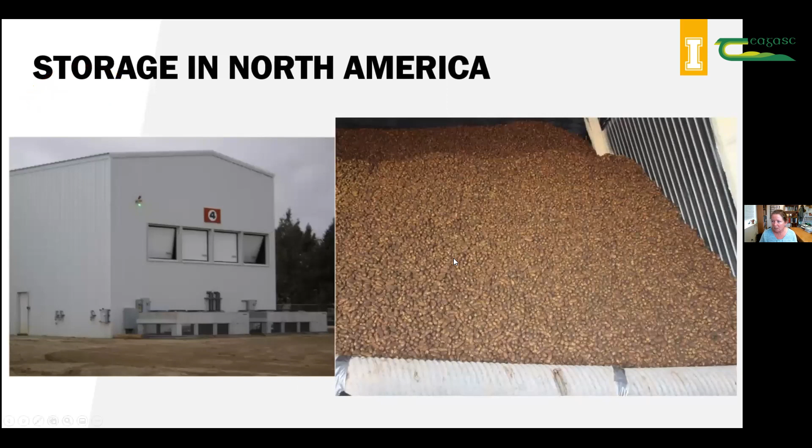The Pacific Northwest, which I have highlighted in yellow, produces about 50% of the total US acreage. And the reason this is important is how important climate is in terms of how we manage our storages. Our management has evolved because of our climate: in this northern tier we have warm days during the growing season, cool nights, and then cold winters and low humidity. This allows us to really modify what we need to do in storage.

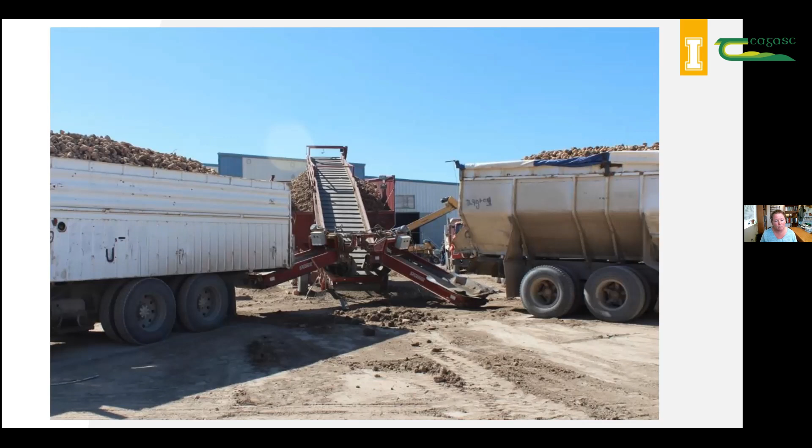And I realize that does not account for the maritime conditions, the higher humidity states. But I'm going to address more those areas where we have the opportunity to adjust that. We produce a lot of potatoes in a short amount of time, and that could be almost to our detriment. Potatoes go in very fast, in a lot of bulk, and that doesn't allow us to pivot or adjust very quickly, primarily because our harvest window can be very short.

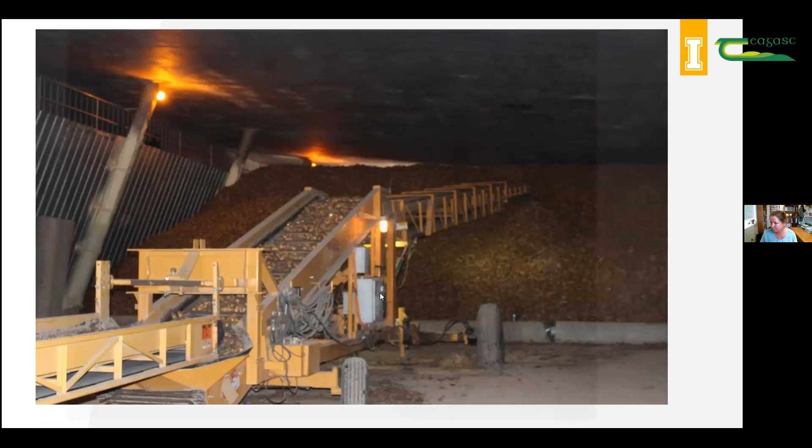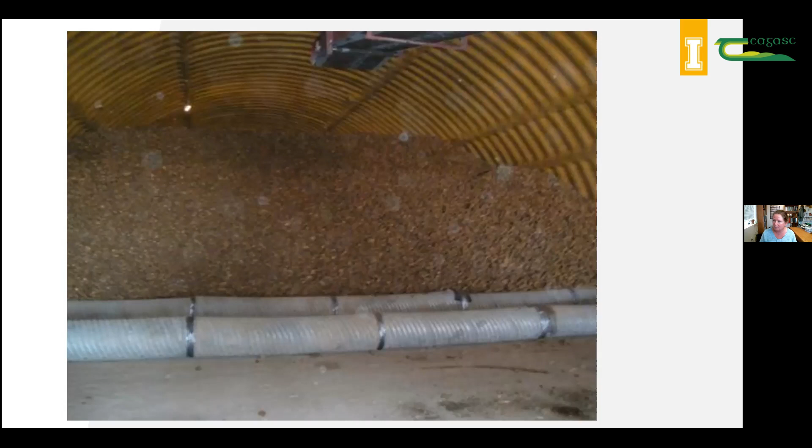Predominantly all the potatoes grown in this area are bulk piled. We either use above ground duct systems like you see here, which is very common in Idaho because we have dirt floors, or, more in the Columbia Basin of Washington and Oregon or other regions of the US, in-floor duct systems. So it can vary depending upon storage capacity, the ability to flume potatoes out, all those kinds of things. But in Idaho we are dominated by above floor plenums.

Here's an example of what our storages can look like. We fill them very tall with a lot of bulk potatoes, which does not give a lot of flexibility. One of the things we have been doing is building very large storages, and some have what we call a split bay storage with one ventilation system. So you may have 150 million pounds of potatoes on one side of the bay, and another bay has another.

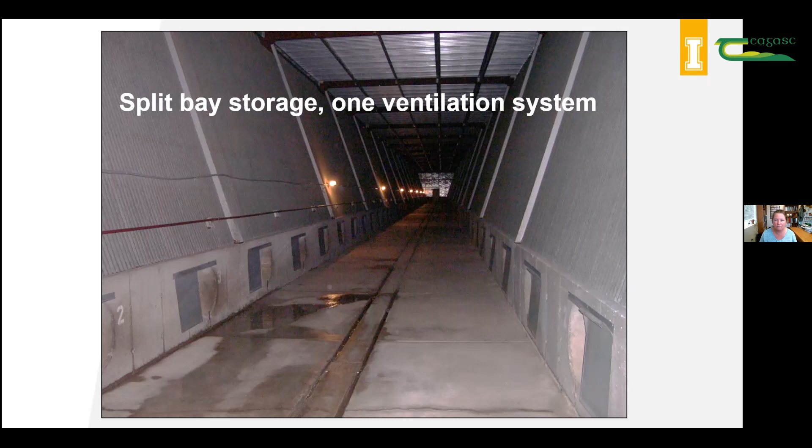And so the difficulty is that, yes, we can store a lot of potatoes under a common roof, but you're not able to manage small areas that then have problems. Or if you're harvesting under different weather conditions, it doesn't allow you to pivot very easily. So we're really trying to micromanage some of these areas within these storages, or make decisions that affect all the potatoes, and that can be very costly or very difficult sometimes.

Almost all storages, especially in the Northwest, again, not including the Maritimes and the far western areas, use evaporative cooling systems. This allows us to have humidity close to about 85%, give or take. So that's a nice background base of humidification to have. And then we're able to have a supplemental one. Here's an example of a centrifugal humidifier that gives us some supplemental humidification when we need it.

There's a couple reasons why the backbone of our storages relies upon evaporative cooling pads: not only does it give humidification, but it also allows us to bring in a little bit warmer air and, due to evaporative cooling, allows that air to cool. And then we're able to extend our cooling opportunities for those storages.

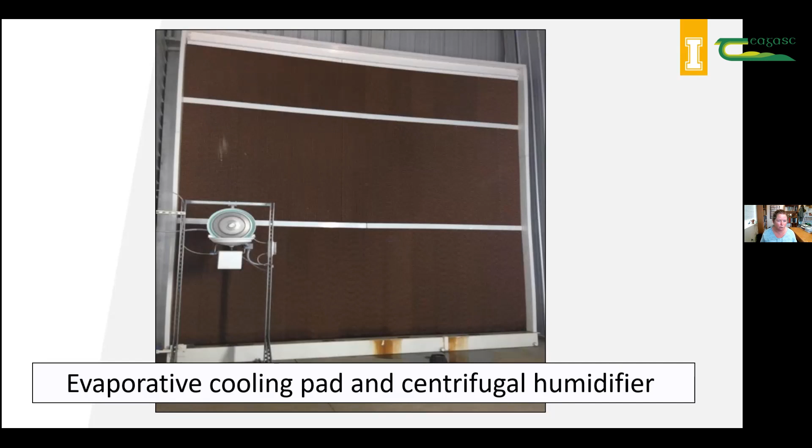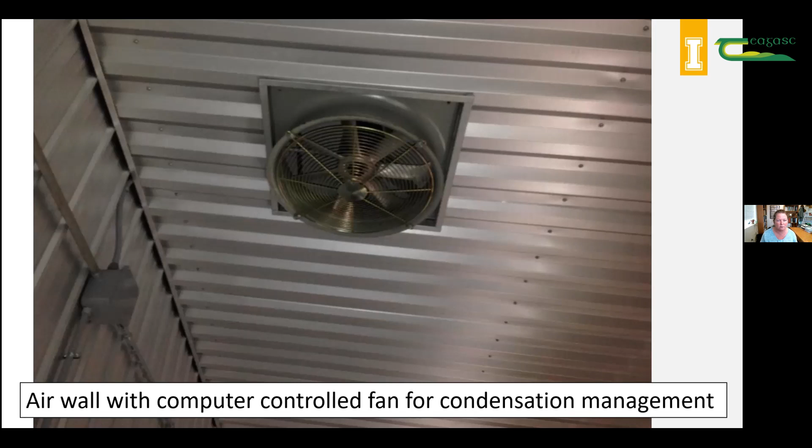We do battle condensation, both on the walls and within the pile. A lot of that is just because we're bringing a lot of potatoes in, and they can have very variable conditions, pulp temperatures, soil moisture, all of that. So we do definitely battle condensation. Plus, we're keeping a lot of our processed potatoes a little bit on the warmer side, and of course we have cool temperatures outside of the building. So a constant battle.

As with you and many other parts of Europe and the world, we are all computerized. We all get information on our smartphones, things like that. One thing that we've noticed is that we do measure carbon dioxide, but we don't rely upon those numbers as much to manage our storages. We manage our storages primarily by the differential in temperature from the bottom of the bulk pile to the top of the pile. So we're modifying our ventilation system and bringing in outside air to maintain that temperature.

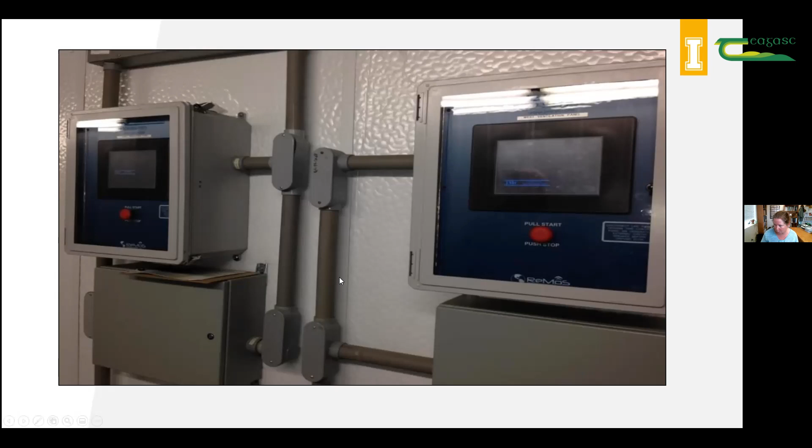So CO2 in some storages is monitored, but it is not the norm for a lot of our storages, nor do we necessarily manage based upon those numbers. It's a little bit different than some of the other countries that we see.

We do in certain regions rely upon refrigeration. That depends upon where you're located and how long you're going to store those potatoes, whether we might use refrigeration early on when we first put the potatoes into storage, if it is on the warmer side, or if we need to extend our season and make sure that we have the ability to cool those potatoes or keep them cool until the following year. So refrigeration can be a common practice, but it's not always.

So really our dependence upon cool outside air is very strong. Every day you've got fresh air coming into these potatoes, cooling them off, without necessarily using refrigeration. A lot of storages actually do not have refrigeration. But as with any system, we can have a lot of failures too. Here's just an example of a major failure in one of our storages.

So what brings upon those failures? Well, you can imagine any kind of rot coming into a large bulk pile. It never happens at the edges of the pile. It's always going to happen in the middle, where a lot of problems can occur. So what do we see? A lot of wet rots coming in. Potentially we have condensation events.

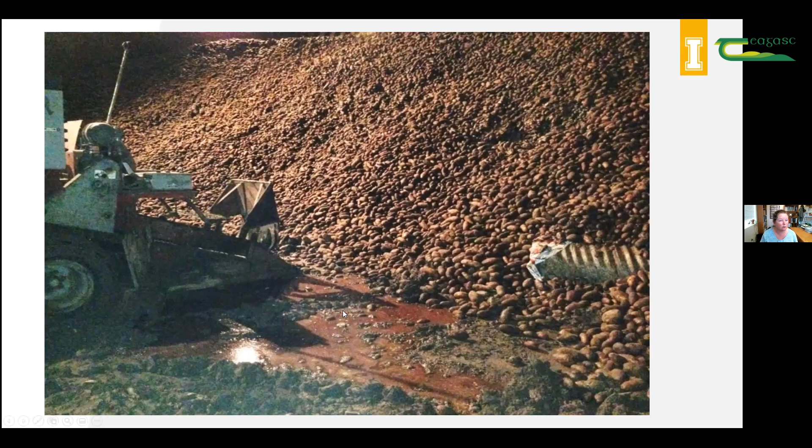So I was asked to talk a little bit about sprout control options. Obviously we want to store potatoes at the coolest potato temperature possible, and that is the directive for any potatoes worldwide. We select the variety that is best suited for the intended market, and then we store it at our coolest temperatures.

Now, one of the conversations we're having today is about fresh cut crisps. Our potatoes are dominated by processed potatoes. We're very concerned about cold temperatures, sugar concentrations and fry color. But we did have a shift a few years ago with fresh cut, in particular a company called Five Guys Burgers and Fries coming into Idaho and wanting to use some of these cold-stored potatoes for fresh cut fries.

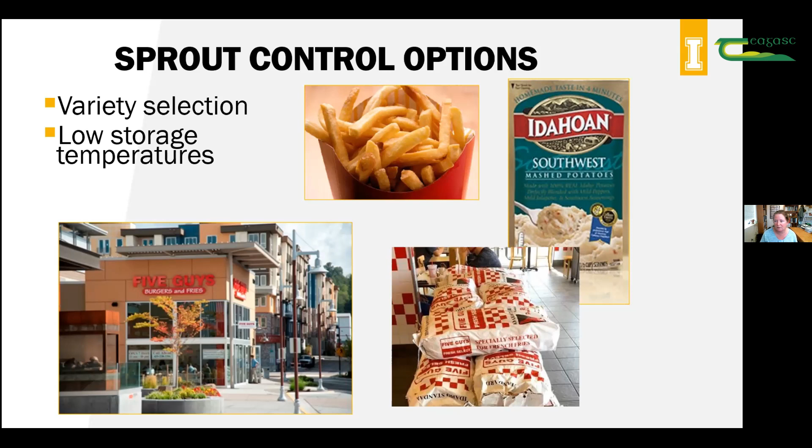And so even with that, we realized that those low storage temperatures can have a unique, obviously, impact even in this sector. As you're well familiar with talking about sugar concentrations and fry color and that close association, a lot of varieties have very much of a cutting point or a time where they definitely shift. And here's just an example.

Russet Norkotah would never be one that would fry, but some people were trying to use them as a fresh cut fry. And you can see when you start to hold them at cold temperatures, obviously the color is just not acceptable. But you can also see by these certain lines here that you can adjust and be acceptable at certain temperatures. Again, every variety has some sort of a breaking point.

Let me get rid of my pointer here.

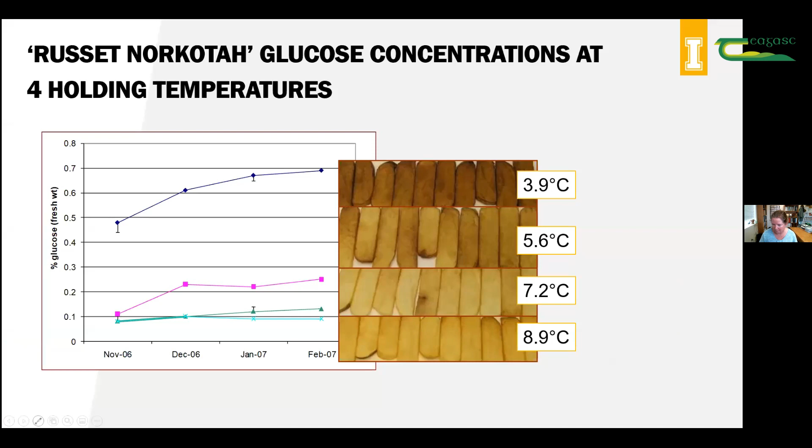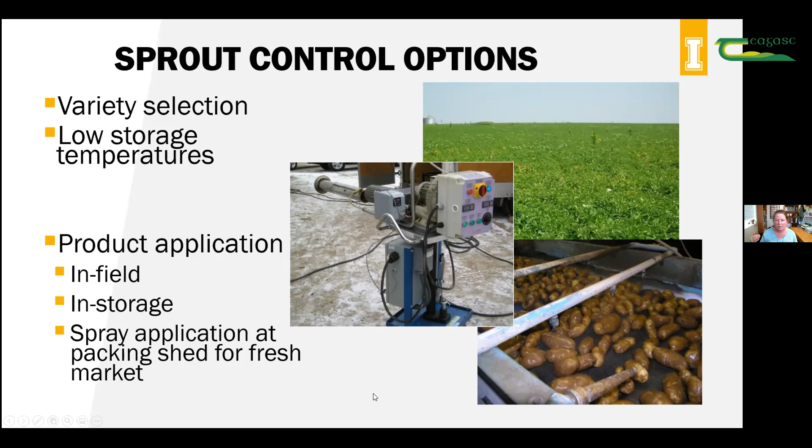The other component is in terms of not being able to always use variety selection. Sometimes that's mandated by our market, but that's obviously our first line of defense in terms of sprout control options. Not always having the opportunity to use low storage temperatures, we must rely upon product application. And these would be either in the field, in the storage, or we do have the opportunity for our fresh market or ware market to have a spray application at the packing shed.

So here's just a list of the major sprout control products in the US. CIPC is our predominant product used. And I won't belabor it too much, but I will talk a little bit about that. We do use MH30, DMN, SmartBlock, and I know these are not registered in your area, 1,4-Zap or 1-octanol, DIPN, and then we use the essential oils as well.

They are primarily thermally applied, except if you're doing an at-packing spray application, which primarily we see with CIPC or the clove oil. They can be a single product alone, or they will mix either in sequence or actually physically mix them together. And really the rates are going to be very dependent upon variety, storage duration, storage temperature, and all those things. So the key component here is that there's not a one-size-fits-all sprout control program for all varieties. They really have to be tailor-made to fit the variety, the market, and the temperature.

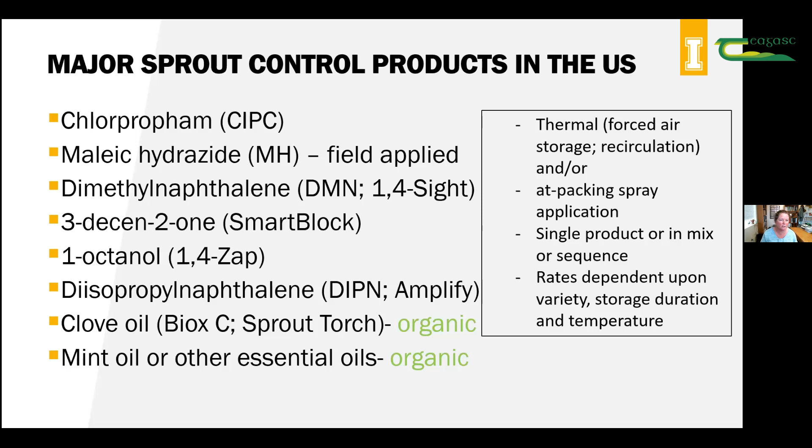So CIPC in general, I just want to point out the differences between Europe and what we have done is that we typically only had 1 or even 2 applications, and that was it. And so I think that's a little bit different in terms of where we rely upon CIPC. Also, we are so far away from our markets in the US. Let's just say, for example, if we are trucking from Idaho all the way to the eastern side of our country, by truck it could be up to 14 days until a customer would ever purchase it. If we shipped it by rail, it would be up to 30 days. And so our reliance upon CIPC or a very strong sprout inhibitor is the backbone to our industry and our distribution of potatoes throughout the whole storage season.

When you start talking about export and where we're going with export, we're talking about 3 weeks to over 5 weeks in terms of the ability to have those potatoes sprout inhibited when we start going to some of our export markets. So again, our reliance upon CIPC, you can see. So we look to you guys in terms of what happens in the future, how we're going to rely upon other products besides that.

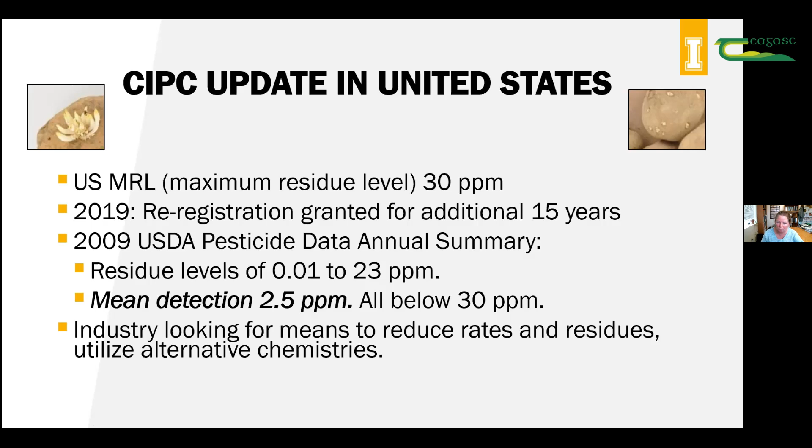One good news for us, at least, is that we were just granted re-registration of CIPC for an additional 15 years. And again, that does not mean that we're not looking at alternatives, but the way that we have been using CIPC and having our MRLs at 30 parts per million has allowed us a lot more flexibility in terms of our CIPC use.

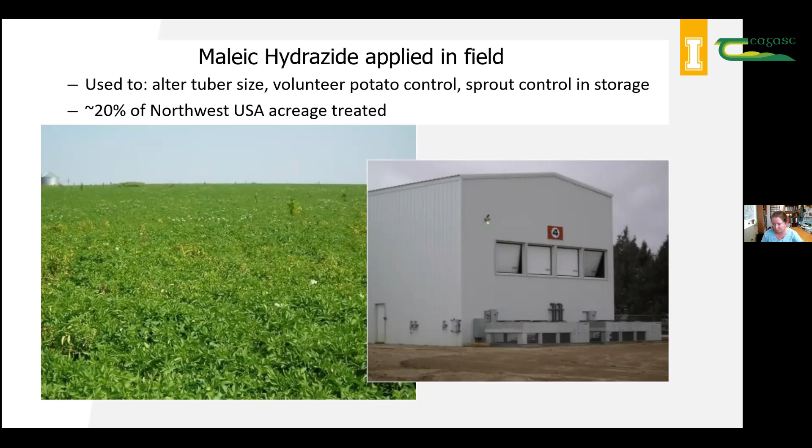That being said, let's talk about some of the products that you can use or that will be coming to you. Is it maleic hydrazide? In the Northwest, as I described, about 20% of our acres are treated with maleic hydrazide. We use it primarily to alter tuber size and for volunteer potato control, but we also use it for sprout control in storage. One of the things that we talk about with maleic hydrazide is that there's an art and science to MH, for sure.

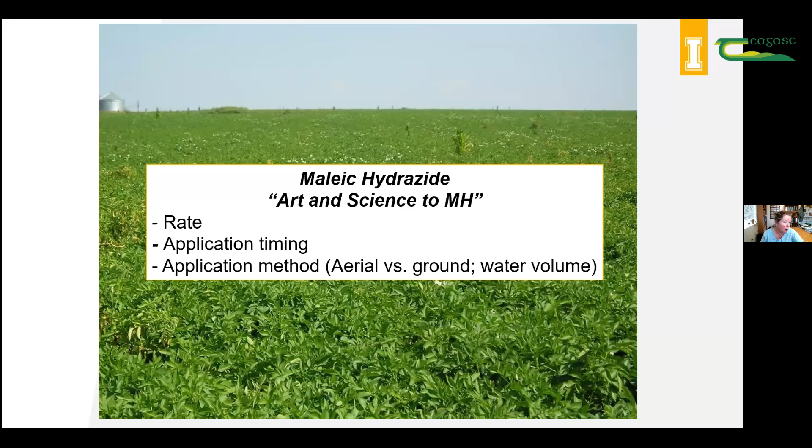And that's going to really be dependent upon your rate, your variety, your application timing, your application method. All of these things can really play into that art as well as science part of applying MH. And I think this is why MH can be a little bit frustrating due to the art side of applying it. Here's a little bit of research that we've done. Again, this is on Russet Burbank. That's a very long dormancy variety.

But what I want to point out just real quickly here is that we applied MH at different timings. MH here is either 5 weeks prior to vine kill or 3 weeks prior to vine kill. If you have the untreated, obviously they're growing very, very quickly in storage, indicated by the blue line on the graph. But what we see, and this has been consistent with different varieties, different years, is that timing can make a huge difference in terms of how well MH30 works or not.

The earlier we apply it, meaning earlier in the growing season, so more weeks prior to vine kill, the better control we had in storage. We also see on the right-hand side, where we've done a different sprout rating scale, that once they get to a certain level, a number 3, let's say, where they're actually starting to elongate, what we call dormancy break, with MH we often get roughly an additional 30 days before they start to break.

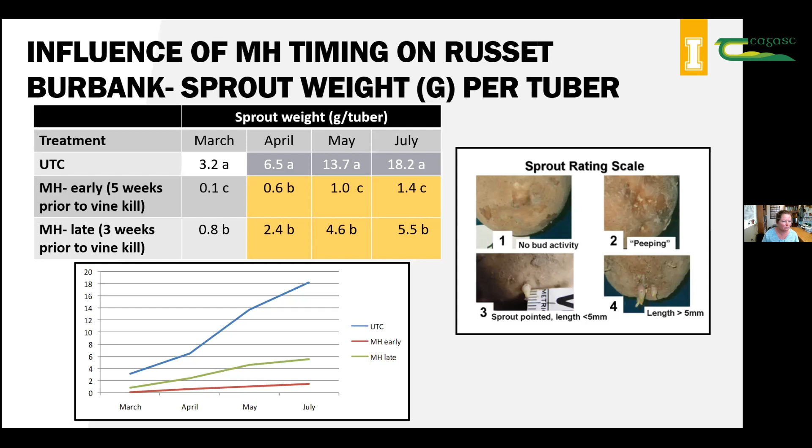Again, you're not really eliminating peeping or sprout development at the smaller stages. You're really trying to limit the amount of sprout growth overall. And here's a good example. You can see in the middle, that's the early MH application. Right to the right of it is the late MH application. Here we have some in combination with CIPC, compared to the untreated control. And this is in July. So again, you still have sprout development. You're just going to have to follow up with something else to really remove those sprouts.

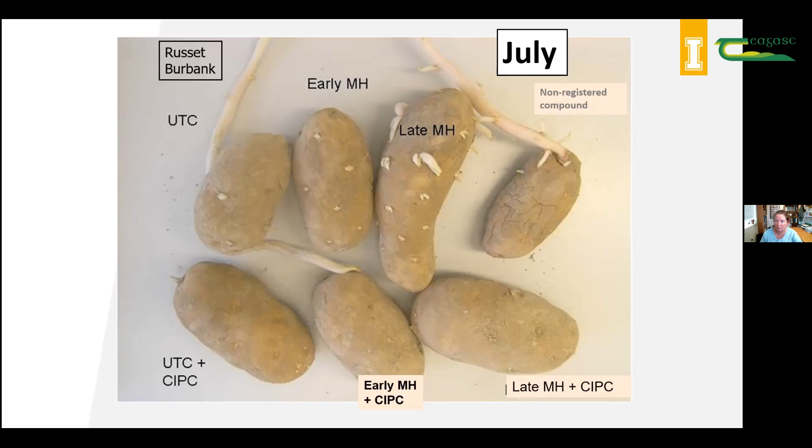The other thing that we really like about MH in a non-CIPC program is, and again, it's by variety, it actually promotes sprouts to bud out at all the eyes. And this allows much greater opportunity and much more consistency in coming back in with another product, such as DMN or clove oil or mint oil. We do see MH30 used quite a bit. Some of it will be alone, for early markets or early processing markets, because with processing potatoes, you can allow a little bit of sprout development.

DMN, I won't talk too much about because I know we're going to talk a lot about that, but in the US, even though it is used for dormancy enhancement and sprout control, we definitely see it used a lot more for additional benefits. And you'll see lower application rates in the US because of that. They're looking at bruise benefits, shrinkage, and that synergistic combination with CIPC for better sprout control.

And I think this is a good example of where we are headed in the US: not the single reliance upon CIPC. We're seeing these combinations come in, and these programs put together. And I think that's really important in terms of how we're all evolving globally on how to handle sprout control and the diversity that we have in varieties and sprouting characteristics. We do use it on seed. It is registered for seed. I would say that quite a bit is used on seed.

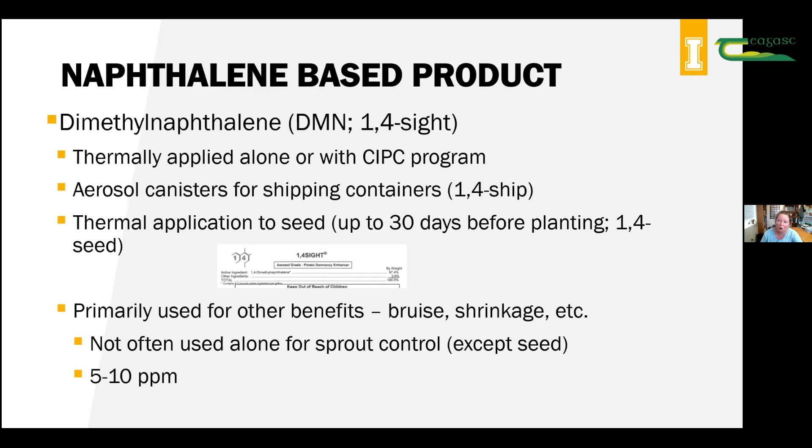And there are DMN canisters, aerosol canisters that can be used for shipping containers as well. So again, the diversity is there. We have clove oil, mint oil, and I've highlighted clove oil, primarily because clove oil is the predominant essential oil that we use, although we do have mint oil available. This is definitely art and science. There's art and science for sure, maybe even much more art to a lot of the essential oils.

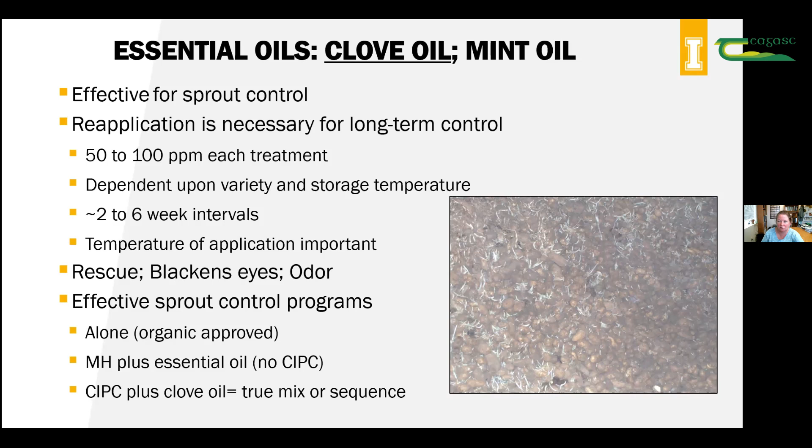And again, these are much more used for either rescue treatments or to blacken those eyes, or predominantly in our organic system, or in those synergistic combinations with clove oil to really make CIPC work better. These are products that have to be applied several times in the storage season on a very consistent basis. The reason is that once you start applying, it's almost like you're just burning off or physically damaging that sprout, and more sprouts are going to want to grow from that region.

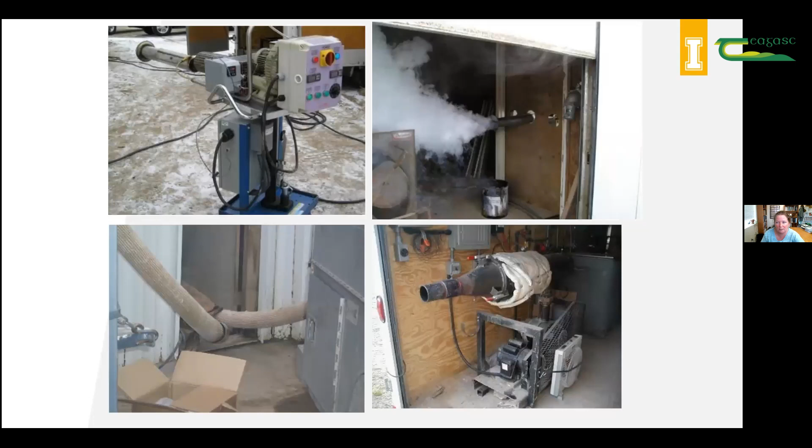One question we often get is why are we not using ethylene? One of the things I pointed out earlier is our reliance upon outside air, a dominant part of our program. So it makes it very difficult to maintain certain parts per million of ethylene at a consistent level in our storages, and our industry has not gone that way. But we're looking at any and all opportunities for additional sprout control. We need something that can be thermally applied into our storages, and these large bulk situations can make it very difficult or cumbersome. How are we going to apply certain products?

So in conclusion, we're looking at single products for our sprout control programs, but really we're evolving into combination programs, because we're trying to fine tune sprout control. We're evolving in terms of our varieties. We're excited to see more of the European style variety selection come our way, which has been great. But that changes our programs, because we now need to adjust for different dormancy lengths and aggressiveness of some of those sprouts.

What we see overall in storage management is this impact of climate, temperatures changing on us. How are we going to adjust for this? That's where we're starting to see a lot more of our storage evolve. We're starting to bring in a bit more of that European style of airflow, ventilation aggressiveness, but still based upon our management and our climate. And universal to everybody, the quality mandate continues to grow. How are we going to adjust for that using new technology and variety selection?

So I apologize for my technical difficulties. I will keep practicing the Zoom thing, and I'd be happy to answer any questions. Don't worry, Nora. It definitely was worth waiting for. We'll get through the other presentations, and there are questions coming in, so we'll get you to answer those at the end of the session. AJ or Stephen, whichever of you is up first, please share your screen and put your camera on. There you are, AJ. No worries.

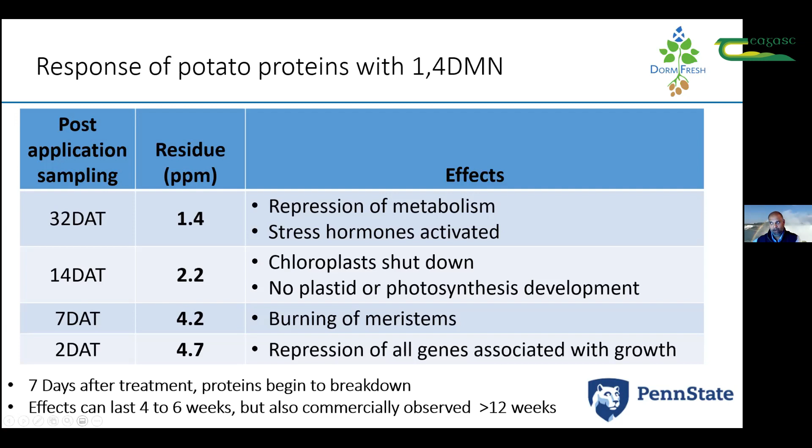Again, this is all dependent on how well you keep the product in the store, how active your crop is, what temperature you're storing that crop at, and the amount of ventilation you have. These are the kind of parameters which Stephen will cover in some detail.

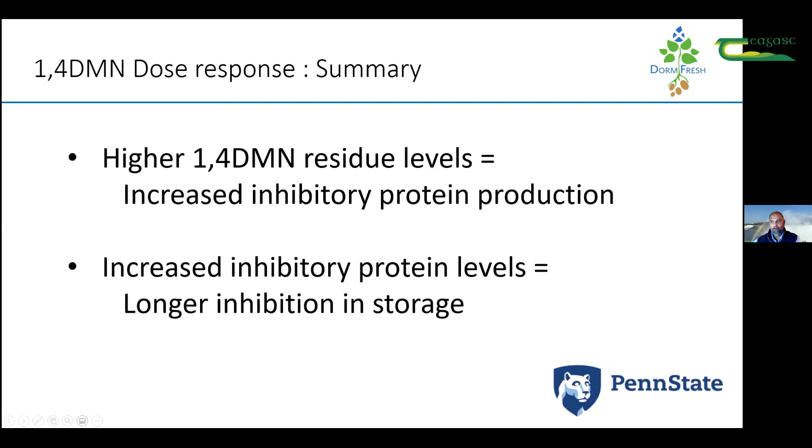So just to recap on the mode of action, what we're trying to do is to get a high level of residue on the potatoes during the application. The higher the level we can get, the more inhibitory proteins are produced, and the higher the level of inhibitory proteins, the longer inhibition we can get in store. Obviously there are various things that will affect that in commercial stores.

And then just some basic messages. I know I've jumped straight into this, but CIPC is not DMN, and if you used CIPC in the past, we have to try and forget a lot of the things associated with CIPC. There is no product out there as effective and as efficient as CIPC. So at the moment, you have to look at the products you've got, and one of those is DMN.

As part of the general training, and to be able to use the product efficiently, we also have a technical manual. That's the DormFresh technical manual, available on our website. There are a lot of considerations, and Stephen will go through some of these in more detail in a few minutes.

The most important things I listed there: store preparation, consider your applications, when and how you do your first applications, and quite importantly, the crops. You can use as little as possible to get effective control over the season, and the only way you can do that is to have close observations and look out for new sprouting.

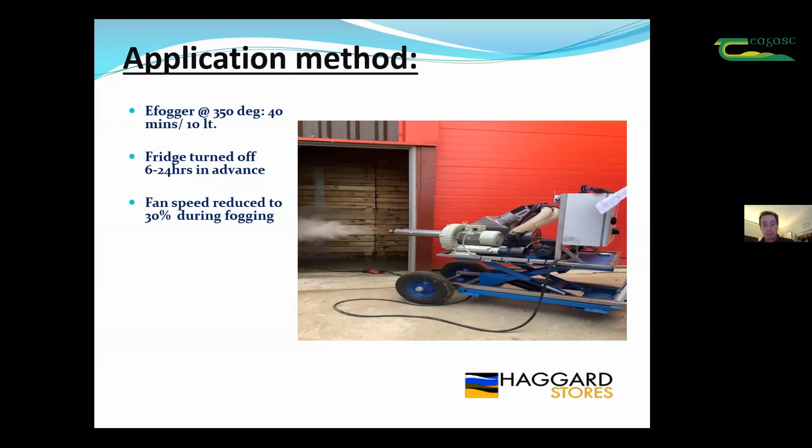During application, fan speed is reduced to 30%, very, very slow. And if you don't have variable rate fans within the store, you're turning your fans on and off every few minutes, just to move the product throughout the store. After application, all the doors are closed to allow 1-4 Sight to settle onto the potatoes for 48 hours.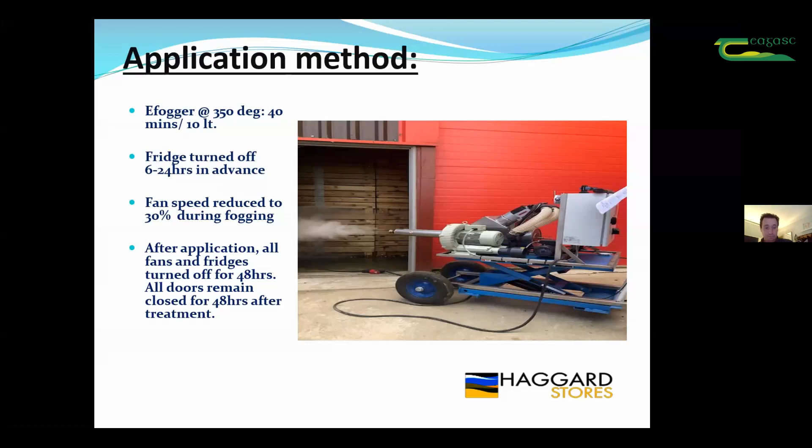So the first phase in getting the most out of 1,4 SIGHT is filling the store. The tubers should be as clean as possible. You don't have to be absolutely very clean, but as free from soil as possible, so you don't have a huge amount of soil covering the tuber, so the actual skin of the tuber is uncovered to take in as much 1,4 SIGHT as possible. The potatoes should be dry. They need to be dry because 1,4 SIGHT is hydrophobic, but there's no need to wait until the potatoes are cured.

So you can go in once the potatoes are dry. So that's fairly early. It's a lot earlier than you would have with CIPC, for example. As I said, potatoes need to be dry. 1,4 SIGHT doesn't like wet potatoes. And the store should be filled full to design capacity in as short a period as possible.

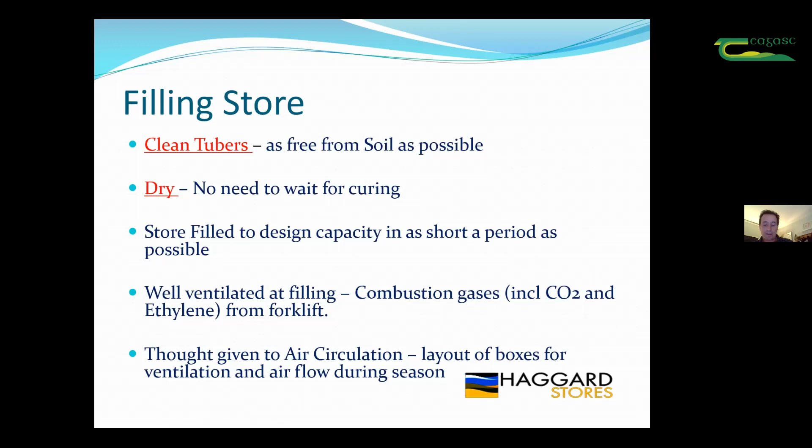This is a small little video, I hope you can all see it, but it demonstrates the machine, the size of the machine, and I just want people to be thinking about it when the machine does come onto your farm, that the position is important. So it has to be close to a three-phase power supply. It's a very easy and simple process, and it's quiet, as you can hear.

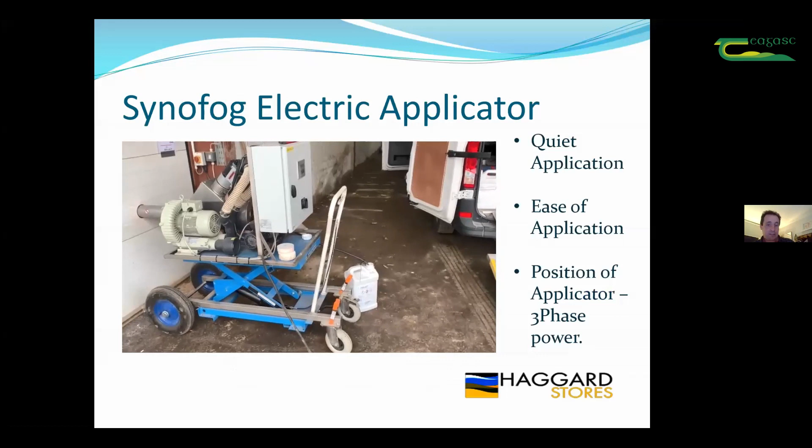This is the next phase then. So first application, when you have decided to do first application of 1,4 SIGHT, early application is very important, because an early application gives you more effective and prolonged sprout control. When you wait for sprouting to start, you're going to have a reduction in quality of that potato. So once those potatoes are dry, that's when you should be going in with 1,4 SIGHT.

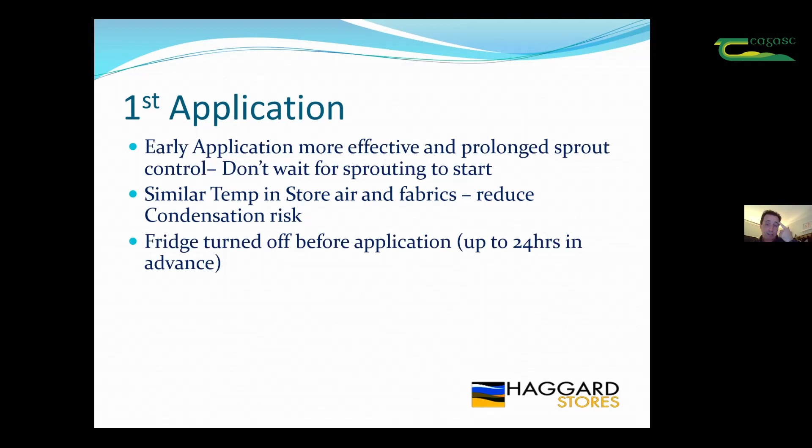The temperature in the store should be fairly similar the whole way through the store, because when there's a condensation risk, you have problems with putting a chemical into a store for obvious reasons. So that's why we ask the fridge to be turned off before application, in most cases up to 24 hours in advance, so that the temperature is fairly similar, and you don't have a frosted area, say, around the fridge unit, for example.

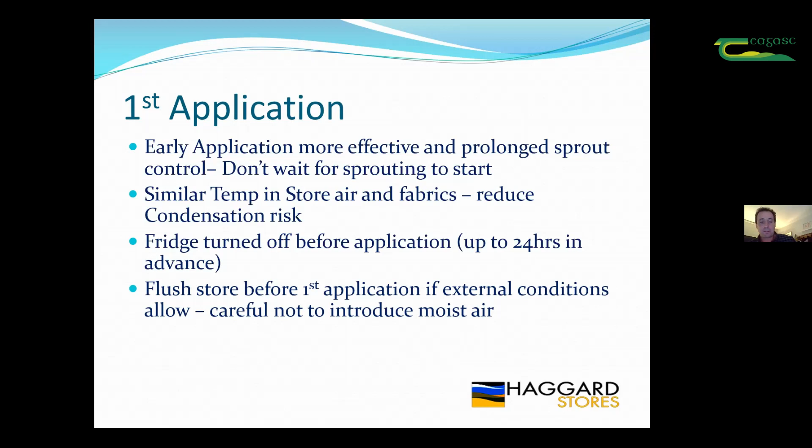Before that first application, so just after drying, it's not a bad idea to flush the store. So my previous point there was that airflow during filling is very important, but it's not a bad idea to give the store a good flush before the application is made, just to make sure there's no CO2 build-up in the store, because after the first application is done, that store will be closed for 48 hours. So it's pretty important to have it clear of any CO2, especially ethylene, or combustion gases that could be in the store.

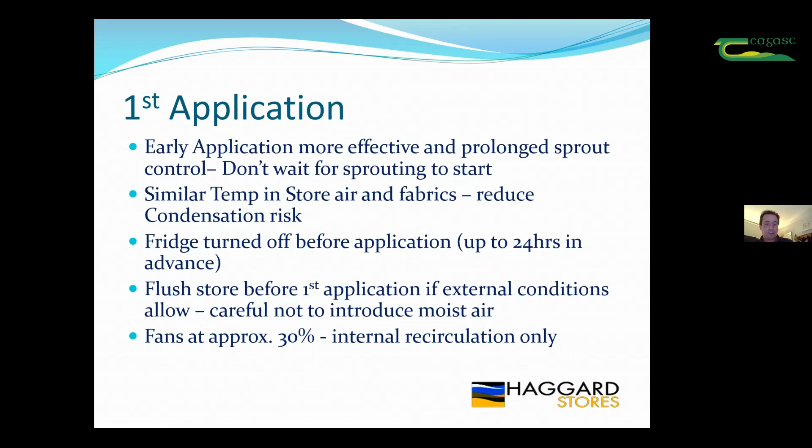During application, fans, as I said before, run at approximately 30% internal recirculation only. And after application, all fans and fridges are closed for 24 to 48 hours. We find that 48 hours is better. If all doors can be closed for that period, it just allows the product to settle down into the potatoes better.

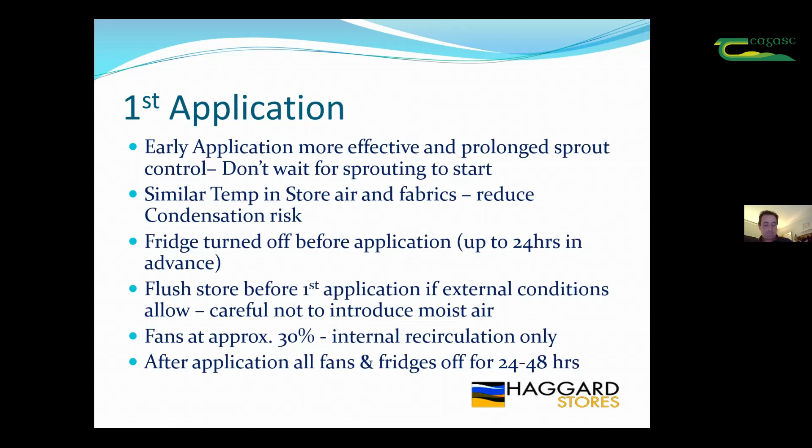So the next period is the storage period. Okay. This is something that probably should be thought of before the potatoes are stored, but it's certainly something to be thinking about, because it will affect how long we're going to get in between applications of 1,4 SIGHT. 1,4 SIGHT is a very volatile product. It's over 100 times more volatile than CIPC. So the more leak-proof your store is, the less product will be used per season.

So another thing to consider as well is CO2 management. Potatoes that are treated with 1,4 SIGHT respire less, so they produce less CO2. So within that store, less CO2 is produced, and there's a reduced need to flush those stores, as would happen with other sprout suppressants. In certain stores in Europe that are treated with 1,4 SIGHT, they are letting the levels build up to over 4,500 parts per million before they flush it. And that just means that 1,4 SIGHT is kept in the store, and they're getting longer periods between applications.

And to make that possible, monitoring is advisable. So we have a few stores that have handheld monitors that will go in, or even in some of the newer stores they have it built into the store units, and they can just see the levels of CO2, and people are more confident then that they don't have to be flushing it all the time. There's a lot of studies out now that are showing that CO2 does not affect fry colour, and that's just something to bear in mind.

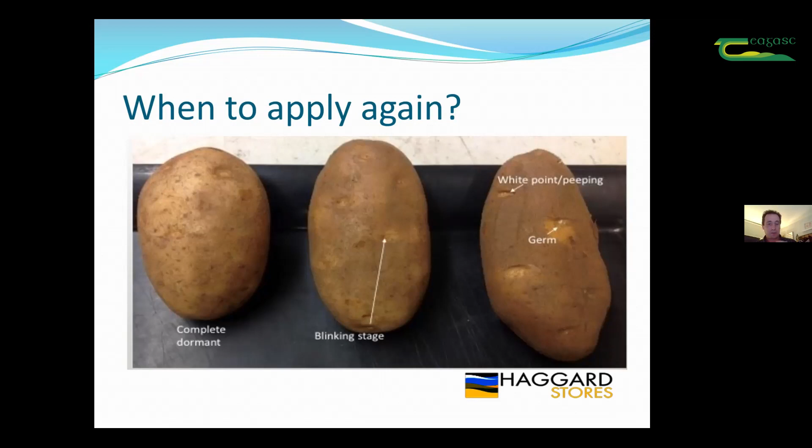In certain stores, that's happening in between 4 to 6 weeks, and in stores where the first application was in early October, mid-October, we've had to come back in fairly soon. But generally, we found that we can get a good 6 to 8 weeks out of it. But the potatoes themselves have to be monitored very well.

So to decide which rate you're going to come back in with and when to do your subsequent applications, it does vary depending on many factors. For example, crop growing, the season that the potato has to grow in, weather it has to grow through, and the conditions of harvesting. Different varieties will have higher dormancy readings, the storage duration, temperature that you're keeping those potatoes at, how long you're going to be keeping them in the store before they're sold, and the ventilation type for sure, and the CO2 management.

So how often that store has been flushed, or whether it's been allowed to build to a certain level before it's flushed. The quality, so how many leakages are in the store. The store fill level. So if you have half a store that's empty, you're putting this very volatile product, and it's going to obviously go into all the areas, and it's not going to completely get into the potatoes where you want it.

This is an example of the store, the first store we actually did back in October 2018. We learned a lot in that season. And that first season, we discovered that there were a lot of areas in the store that the air didn't flow into. So we had pockets that were sprouting, and we ended up using a lot of product, nearly 80 mils per ton over that season between October and July. Last season, 19 into 20, a lot of those issues were addressed. So the store was stored until July with only 50 mils per ton.

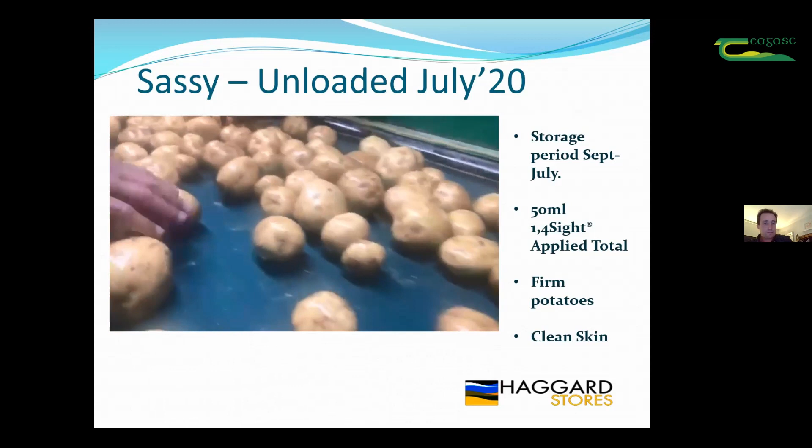The farmer or the grower, he sent us this video. And what he was very impressed with was the quality of the potatoes coming out after such a long period. There was very little weight loss in the boxes. There was a lovely clean colour off the potatoes, and they were very, very firm, as hopefully you can see from the video. And also, in that video there was very little loss as well, so there were very few rotten potatoes after that long period of storage.

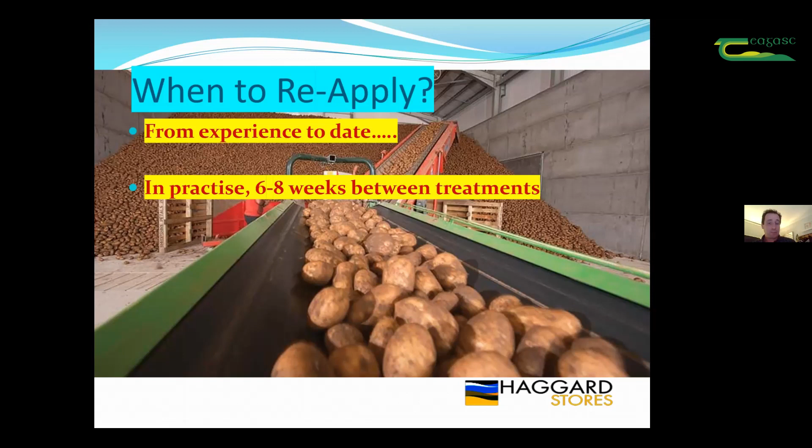So based on our experience, when to reapply: in practice 6 to 8 weeks between treatments. That's what we've got. Of course, it depends on the store. A good properly managed store, and when I say a good store, I mean a store that's reasonably leak-proof and has good airflow throughout all boxes, or in a bulk store, there's good airflow throughout that store, can be easily kept sprout-free until July with 1 full application and 3 half applications, as per that example of the store.

We found the nose test is very useful because you know DMN is in the store by a good smell of it. So if you go into that store and you're not getting a smell, you should be prepared to be treating that again fairly soon. Just some final points before I finish up. The 30-day withholding period before use of potatoes, as I said before.

There is an animal feed restriction, that potatoes treated with 1,4 SIGHT can't be fed to animals. There's data submitted to the Department of Ag to reduce this restriction. Hopefully that will come through fairly soon and come off the label.

Things that we found to bear in mind are certainly external conditions at application: your air temperature, the wind speed, how humid it is outside. If it's very, very cold outside, it does make applying the product fairly hard.

CIPC MRLs: the MRL of CIPC at the moment is 10 parts per million, but it will be reduced to 0.4. 1,4 SIGHT will clean CIPC off fittings. So if a grower hasn't done that already, just be prepared that there will be a level of CIPC, because it will be released into the store after using 1,4 SIGHT, and it will show up in potatoes. Probably not an issue now because the MRL is high for CIPC, but it will be an issue in the future.

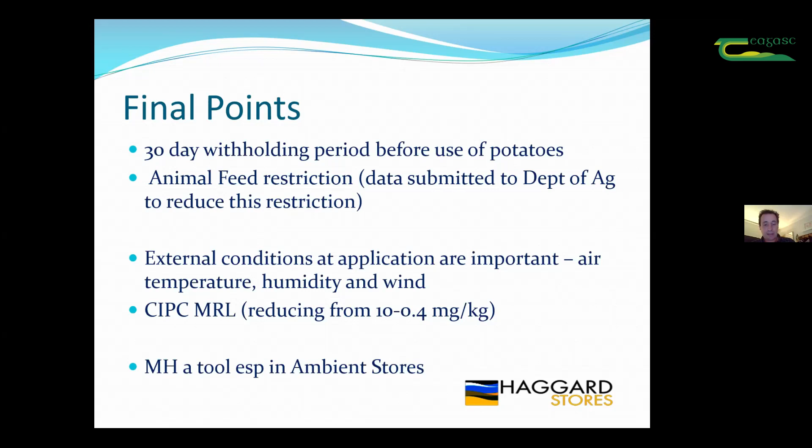Maleic hydrazide is a tool, especially in ambient stores, to get a long period between applications. It just keeps everything nice and easy. As AJ had said before, 1,4 SIGHT is not CIPC, so totally different management techniques are used with 1,4 SIGHT.

So in summary, it's our third season using it. Close to 50,000 tonnes in store has been treated to date, and that doesn't include revisits, so we've plenty of experience and very, very happy growers. A quarter of that 50,000 are cold stores, so it's used in a wide range of stores and varieties, from Rooster to the Pinks to Markies and a lot of crisping varieties too.

An excellent control of sprouts, and we found excellent feedback. And we've often even gone into stores a little bit late, not by design, of course, but the sprouts are a few millimeters long, and it does work as a burner too. The potatoes, as I said before, are lovely and firm. You've very little water loss in boxes compared to other sprout control.

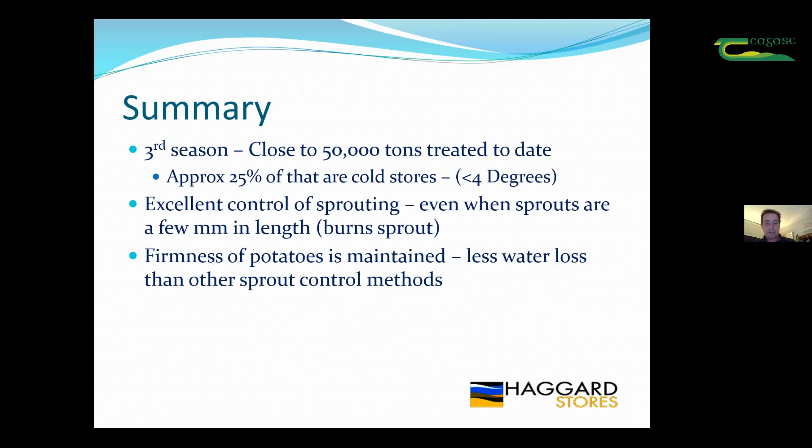The potato doesn't grow, you see, it's kept asleep, I suppose, the whole period, so it's not trying to grow, it's not trying to use up internal reserves. So as I said before, respiration rates are lower, so you have less CO2. We found it's best to use an electrofogger because there's no combustible gases going into the store, and it just means you can fairly confidently keep that store fairly sealed and closed for longer periods of time.

But I have to stress it is a hands-on management compared to other forms of sprout suppressant. Potatoes have to be watched. There has to be thought, as I said before, put to airflow and things like that, more so than when CIPC was used, which was a cheaper sprout suppressant.

Testimony from that first grower was that there was a very noticeable improvement in the condition of potatoes as they left the store compared to when CIPC was used. So he was very, very impressed, and it's definitely given us confidence to use the product going forward.

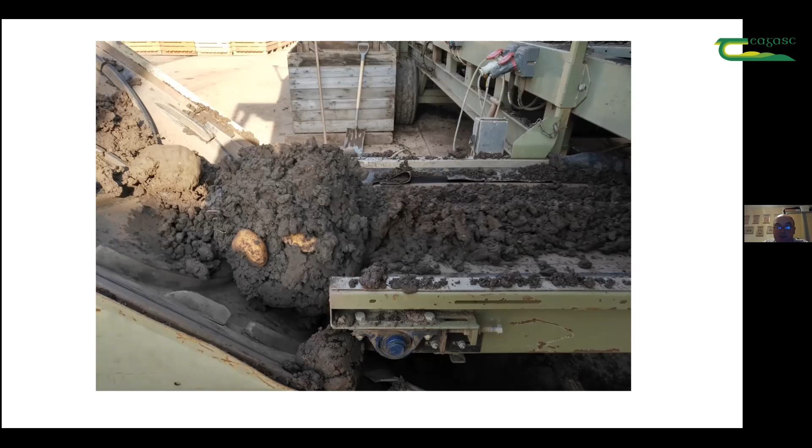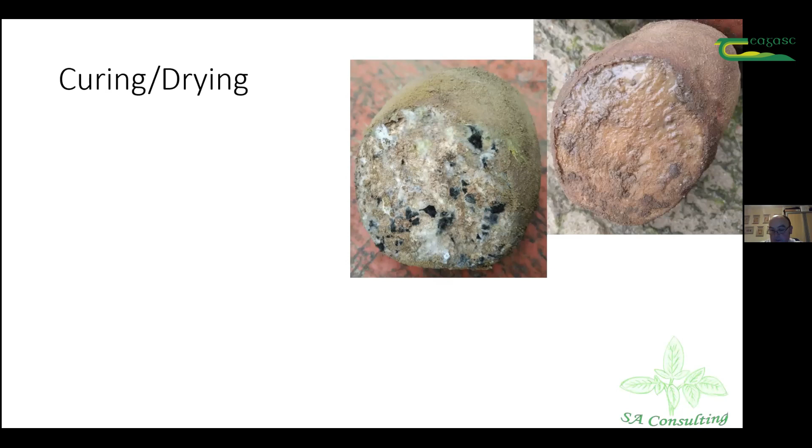So basically, obviously, we're now putting into store potatoes that are a lot wetter and have got a lot more adhering mud to them. So the whole curing and drying process is becoming more difficult. We have had a lot of weather where we've had sort of 12 to 14, 15 degree days, high humidity, and not particularly cool nights. So using a lot of this air has become very, very difficult.

So with wet conditions, we all know, especially when you're into slightly sticky areas, there is a greater risk of cut and slice tubers where shares are being lifted so the harvester can keep moving. And where we are seeing these high humidities, we're seeing poorer wound healing, as you can see from the photo on the right. That was a Rooster, the photo was taken this morning from stuff that's been in store 10 days. The one on the left, well healed, was stored 2 weeks earlier, and I don't hold out a massive amount of hope for that tuber on the right to look like the one on the left for probably another 3 to 4 weeks.

It's also obviously a lot harder to see rots at intake. Since the 23rd of September to the end of October, we've had around about 9.5 inches of rain, and we've probably had another 2 since then. So we're sat somewhere around 11 to 12 inches of rain since it started raining for us in the 3rd week of September. So yeah, it's harder to see rots. We've got waterlogged areas in fields, and there's definitely more rot coming into store, and more adhering soil. And potentially we've got colder crops coming in as well. We had a colder snap about 10 days ago, crop coming in at 6-7 degrees, and 3 days later the ambient was at 14-15.

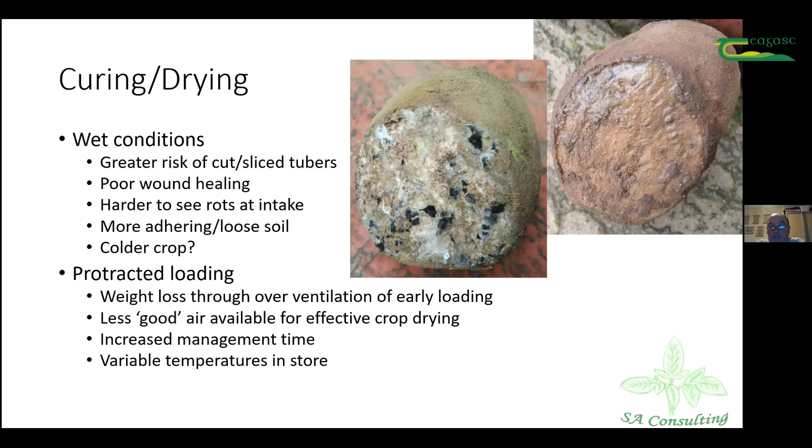All we can do is rely on large amounts of recirculation, bleeding in little bits of air, because we certainly can't put full ambient on. We can't be using the volumes of air as easily as Nora would be at this stage, because we've just got such a range of temperatures, and sweating up these spuds, especially stuff with an odd rot or two, is becoming far more difficult. So where possible, look at your ducts in your bulk stores: where the crops are dry, shut those down, blow the other ones during the day with recirculation and a little bit of purging, and then at night time, open them all up. Don't forget that even the early loaded stuff does need air through it, and don't take for granted it's going to let you ignore it for 10 days.

Just a small touch on processing quality. The stuff that has come in cold has more potential for variability in fry colour, and there is going to be a need on some of this later stuff to precondition. My interest with yourselves has been on chip shop, and at the end of the day, chip shop quality is king. Nothing else matters, and if they aren't frying well, you've got a problem. So keeping those stores a little bit warmer with this later, cold lifted material may be necessary. Look at all the monitoring we've spoken about in previous meetings and manage stores accordingly.

I mean, you've got to bear in mind that I'm making these comments very much based on a history of CIPC. I don't know how well we're going to precondition with the newer treatments. I think that's going to be a bit of a learning curve for all of us.

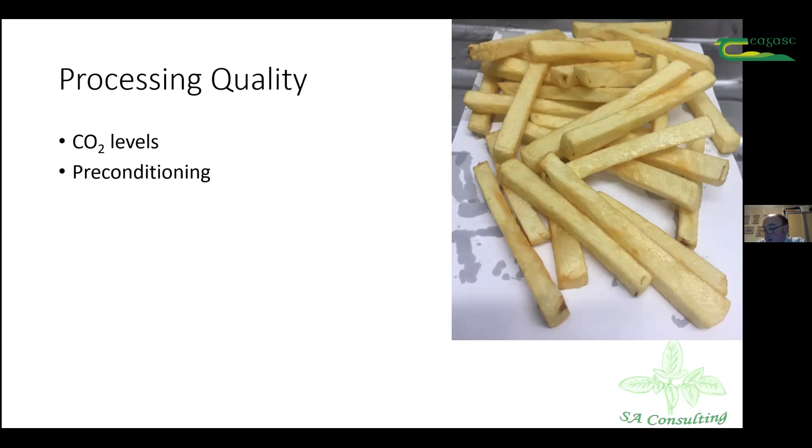And certainly CO2 levels, again, where you've got cold weather, wet spuds, and you're using a lot of recirculation to help dry these potatoes out, just be careful to keep an eye on your CO2 levels, because if they get too high, you will stress those potatoes and you will cause problems. But all of that requires the right air, and at the moment that's becoming slightly more challenging.

Sprout control. Right, having just made the comment about quality, etc. It was interesting to look at the slide that Nora put up of the russet variety. I can't remember, didn't write down what it was, and the impact of quality on different temperatures. I personally, from what I've seen and from my experience with what we are aiming to achieve with the chip shop sector, I'm not convinced that storage temperature is going to be an aid.

I think it is a bit of a myth that we can do much to lower storage temperatures to aid sprout control. Certainly, from my experience, to get any kind of control of sprouting with temperature, you've probably got to be looking at getting down towards 6, 5, possibly even 4 degrees before you see much of a major effect. Okay, from 12 to 10 or 14 to 10, fine, but from 8.5 to 8, I'm not totally convinced that you are going to see enough of a difference to run the risk of potentially having a negative impact on the fry quality.

So I think you've got to manage your storage temperatures according to what the quality of your crop will handle, rather than trying to worry about whether it will help with sprout control. And I accept that that is probably a slightly controversial comment.

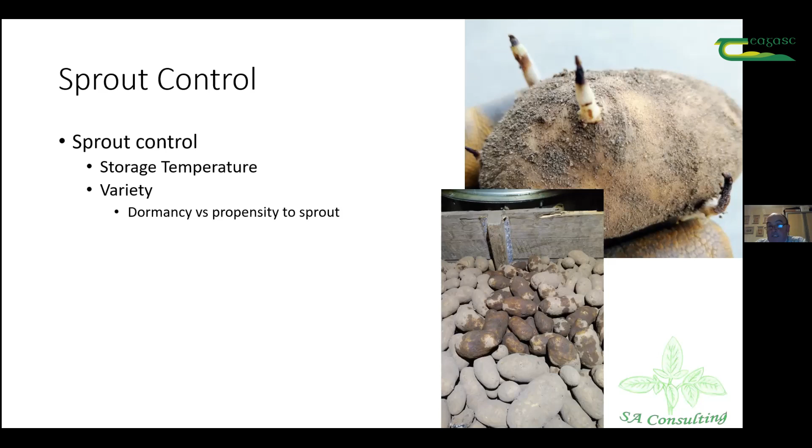So although the dormancy may be different on the two varieties, the propensity to sprout between varieties, I think, is massively... the lack of information is very considerable. So I think you just need to be careful. Don't get totally wrapped up with dormancy as opposed to the propensity of a variety to sprout, especially when you are looking at retreatment of any product whatsoever.

Chemical treatment options, I must admit, looking at Nora's list, I sort of sat here and thought, well, I might as well give up and go home. Looking at the list down there, I will just say that there's two of those that are not available to me today.

Maleic hydrazide, again, referring back to Nora's presentation, I would wholeheartedly agree with her that the earlier you can apply MH, the better. Personally, as an agronomist, I would be looking at 5 to 7 weeks if I can, rather than 5 to 3. Okay, I would much rather put it on 3 weeks well than put it on 5 weeks or 7 weeks badly. But the earlier you can get it on, the better.

It's interesting. I've just done some calculations and communicated with Nora, and basically we're looking at very similar rates of the maleic hydrazide active itself per hectare, around about 3,000 grams. Obviously we're 5 kilos at 600, and very similar. So maleic hydrazide can work.

This year, for me, from what I'm seeing, actually I am not at all convinced it has done an ounce worth of good, and I would have to say that I actually think it has gone on as well as I could have done. I've got various residue samples in with labs for analysis at the moment to see exactly what we have managed to get into those tubers, but I'm seeing dormancy break on a lot of varieties that I would normally say are quite stable.

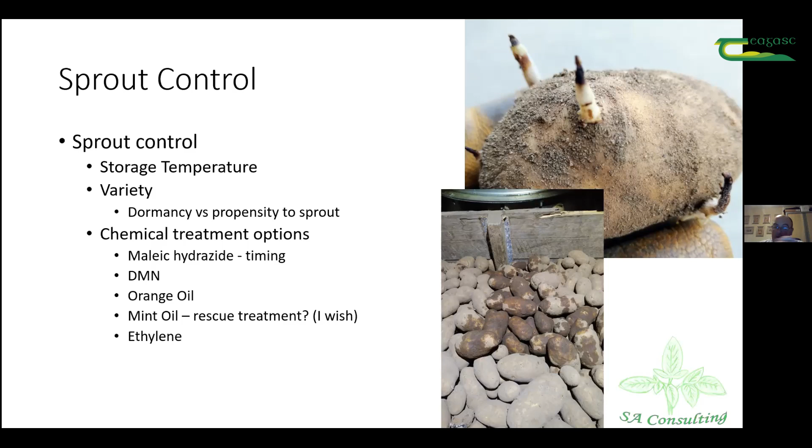But there is concern that the smell of mint oil will put some people off. I put some into a chip shop that had been treated after a fortnight, and I have to say that we could not detect any mint taste. So I'm hoping that my concerns over taint, etc., are very misfounded. And I think that was about it, Shay, from me.

Brilliant, Simon. Thanks a million for that. So can I ask all the contributors to turn on their camera there again.

Just while the others are coming in, Simon, while you have the floor, a question that we were talking about, yourself and myself last week, was where you have prolonged harvest and you have maybe two different types of crop in store. How are you ventilating those crops where you have crop that's starting to cure and you have a crop that's wet coming in? What's your strategy there?

Depends what the store will let me do, Shay. I've got one box store we're still filling. We've been filling that now for 4 weeks, 5 weeks. That came in relatively dry, but I have got ventilation towers at the back, and I've got one turned on one side. So I'm focusing a lot of air constantly blowing down one side of the store. And to be honest, it seems to be doing the job I want.

I'm flushing about every 4 hours. So I'm introducing some drier air, but I'm only running the rest of the store on recirculation cooling. So I'm not pushing anywhere near the amount of air through the rest.

Otherwise, those first boxes would be dropping, I think, about 6 inches to a foot more by now. Great. Okay. Listen, thanks. But in bulk stores, all you can do is just shut the ducts down.